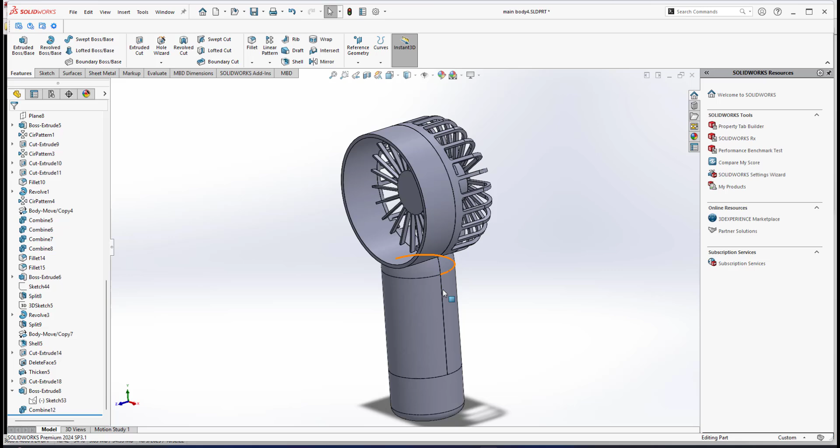This video will be part 4 of my SolidWorks mist spray fan project. In my previous video, I've already shown you how I have done the detailing of this rear casing, where I have shown you how I do this tunnel or channel for the cable or wire to pass through, and here where we mount the DC motor. And also I've shown you the cap to encase the tunnel here.

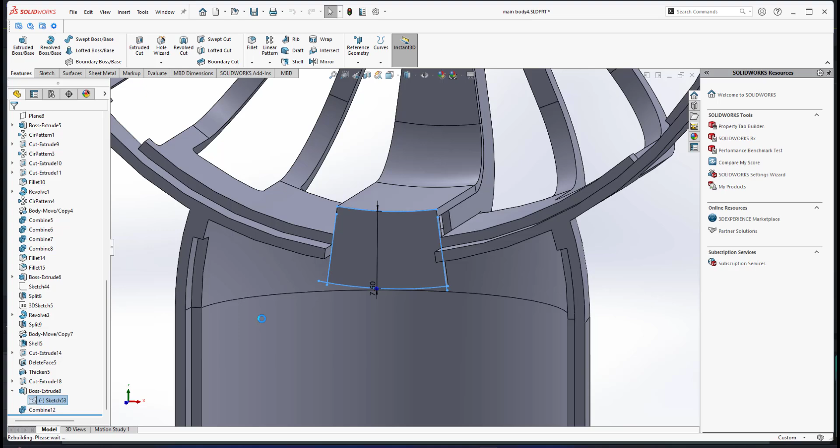So let me exit isolate, and this cap and this rear casing I isolate. So I've done an adjustment, and if you look here, this sketch I've already edited. It's kind of like I traced convert entities of these edges, and I extended the shoulder longer; instead of 5 units previously, I make it 7.5.

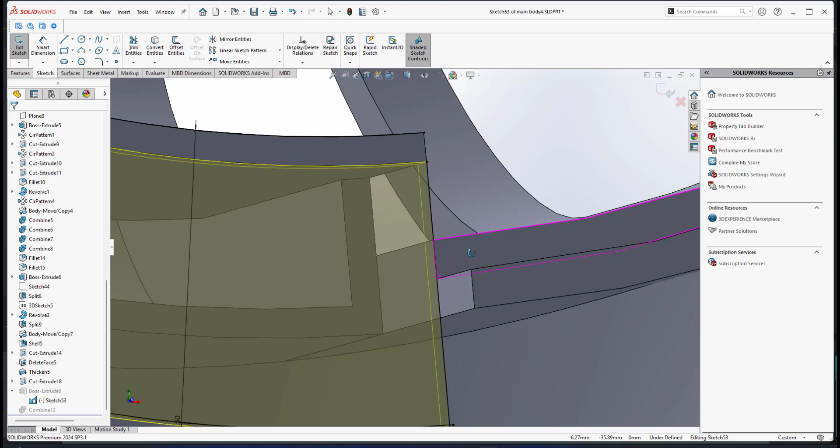So I have the extended version of that shoulder. Now it nicely fits onto this rear casing. There's no intersection, right? All right, for this part 4 video, I will show you another feature. Since this cap is encasing the tunnel, this cap needs to be securely fitted onto this rear casing.

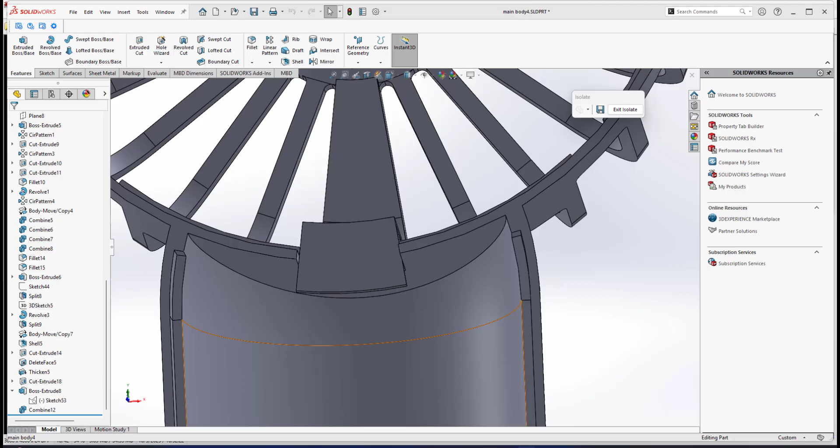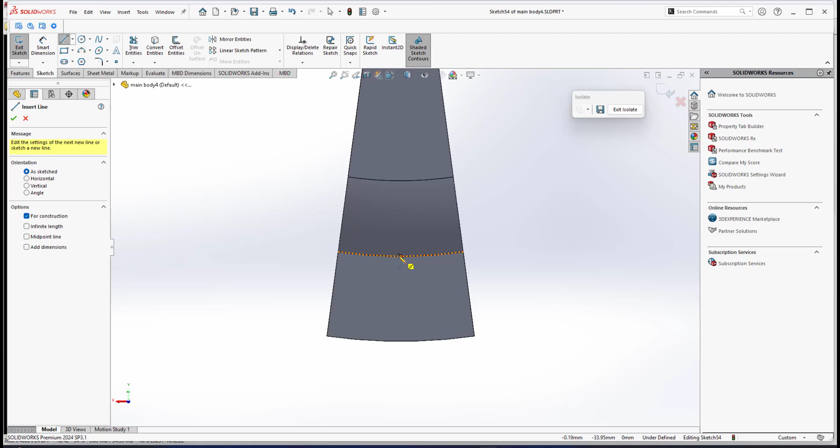Let me focus on this cap here. So I need to create a pin. I have a flat plane, so I will create 2 pins there. Before that, I create a center line from this middle point to this middle point. Now I will create a circle to create the pin. Then I can mirror this about the center line.

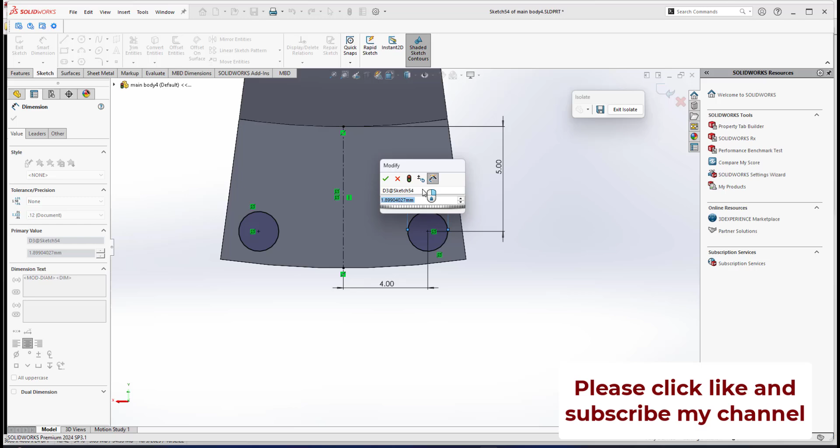Now I can position the pin by giving dimensions: from here to here I put 4, and from this center point to this point I put about 5. The diameter of this pin will be 1.5. I don't want the pin to be too big, about 1.5 millimeter. So these 2 pins I will extrude.

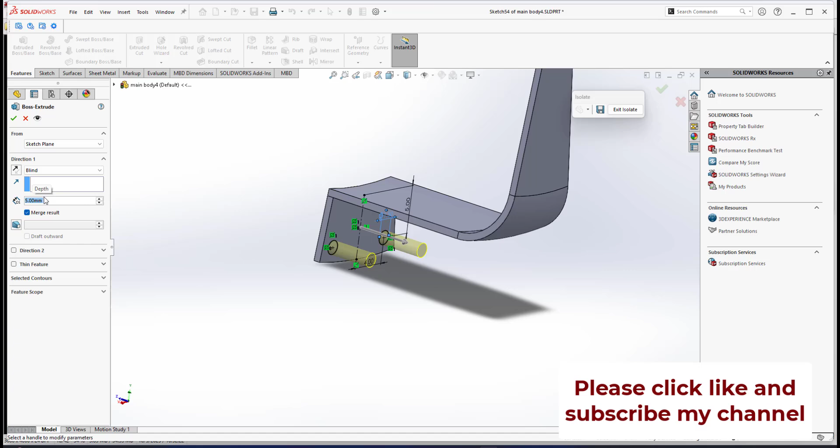I will do extrude. I'm not using up to surface, I'm using blind, and I go for 5 millimeter. Later I can adjust whether the length of these 2 pins is good enough or not. So these will be the 2 pins. Now I exit isolate, and let me isolate the cap and also the rear casing.

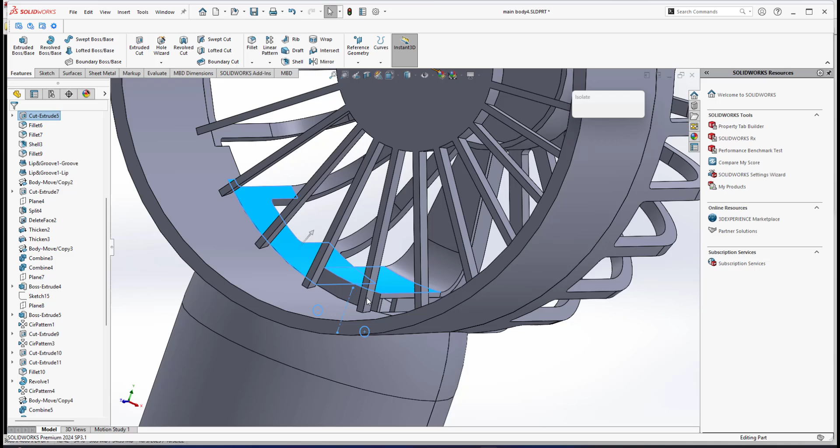Since I have 2 pins here, at the rear casing I will create hollow cylinders, so the pins fit nicely into the holes of those hollow cylinders. So they will hold this cap in a fixed position. Now I'm going to create the hollow cylinders on this rear casing.

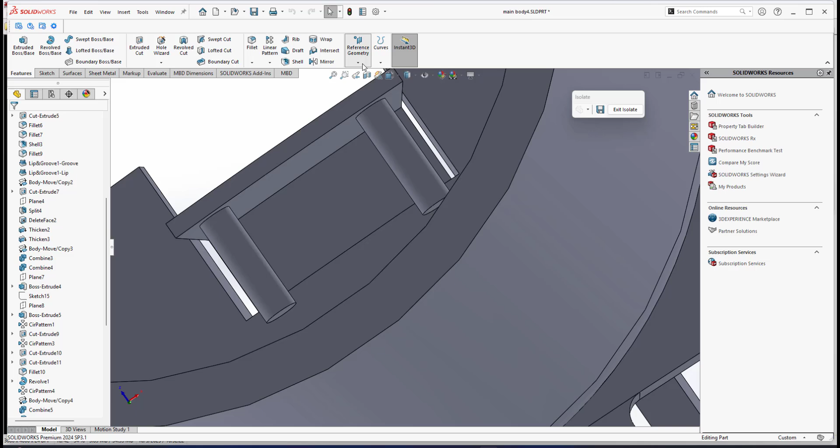I will create a plane to position where I want the hollow cylinder level to be. I can use any flat plane here, so I will create a reference geometry plane from this flat plane. If I go for a distance of 5, that's about the length of the pin, so it will not fit into the holes. I have to make it shorter, like 2 millimeter. So this 2mm will be the level of my hollow cylinder.

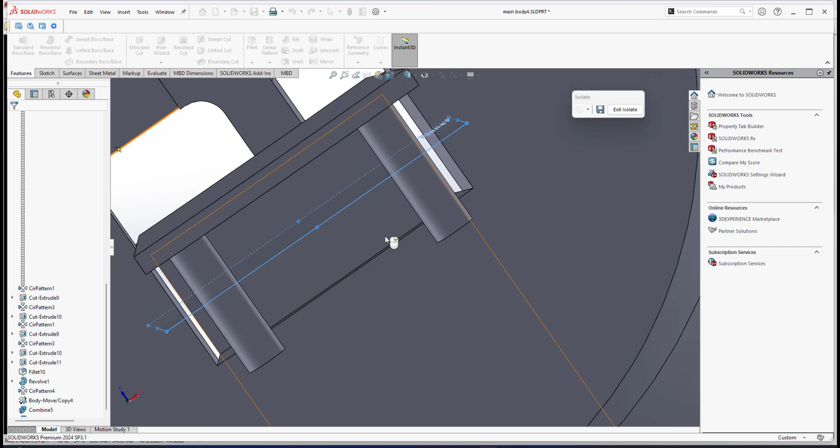So this will be the level for my hollow cylinders. Now I have a plane already created here, so on this plane I create a sketch. Let me scroll like this. So this will be the sketch plane, and I'm now in sketch mode. I will trace the outline of this pin.

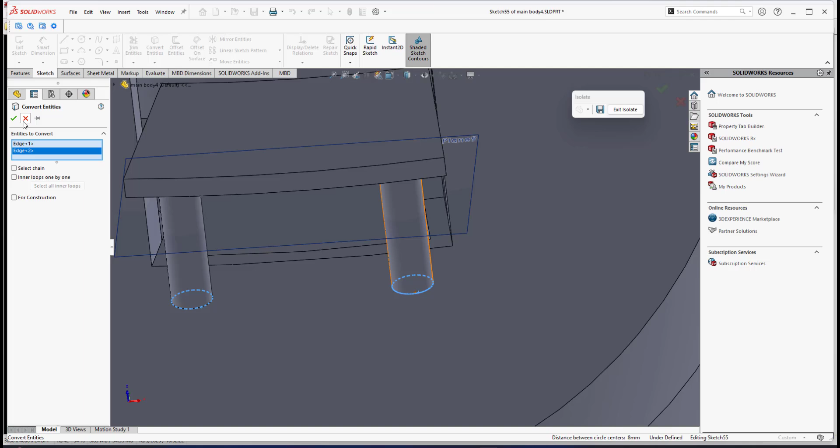I can select even the surface, and the surface I convert to entities. Okay, I cannot do that. Let me go for edges. Let me do that again. This edge, and hold on, carefully select the edge, then convert to entities. So I have a trace image there.

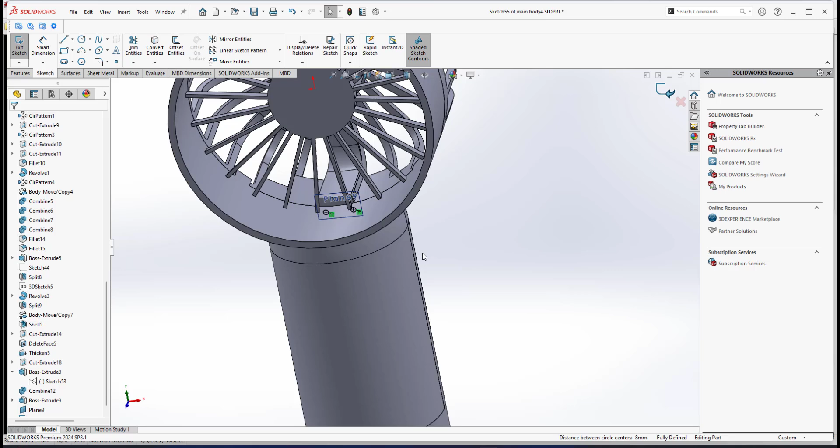Okay, now I exit isolate because I don't want to disturb. When I do modeling, I don't want to affect something. It will merge with the, I wanted to make it a separate modeling, but it is on the rear casing. I already have the trace image here. So I exit sketch. Now I focus on the rear casing.

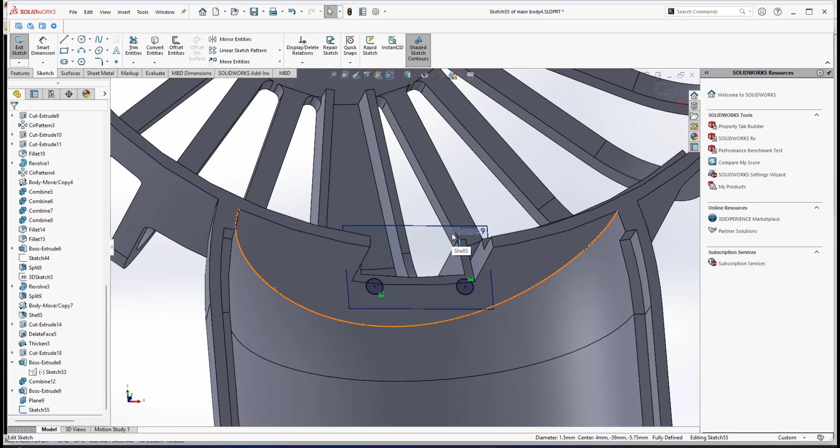So this sketch I will use to make a hollow cylinder. I already have the trace image of the 2 pins. So I edit the sketch, right? And now this is the diameter of the pin. So I will make an offset by about 0.5. Let me try for 0.5. So this will be the thickness of the hollow cylinder.

Then I click OK. So these 2 profiles here, I will do extrude. I'm using up to surface. And now if I click OK, we have the features of these 2 hollow cylinders, right? Hollow cylinder onto this rear casing. Let me save my file.

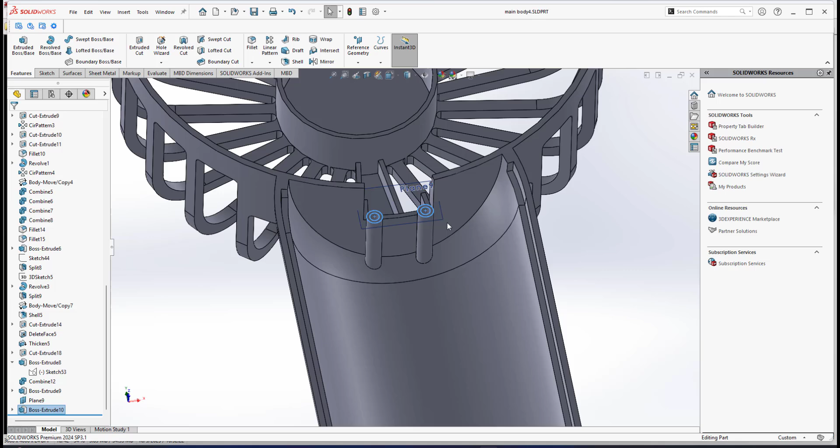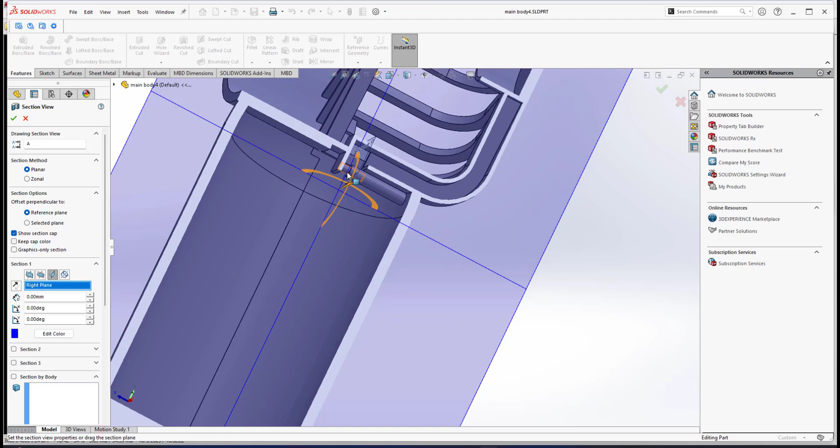Okay, so if I exit isolate, right? If I go for section view, right section view, let me show you. I can go for this section view. If I drag it, you can see the pin. No, I go for right section view. Hold on. I go for right section view, then I can show you the pin is nicely fitted.

Okay, if you look at this section view, this is a pin from the cap, nicely fitted onto this hollow cylinder, right? Okay, that's the feature I want to show you. Okay, let me save my file.

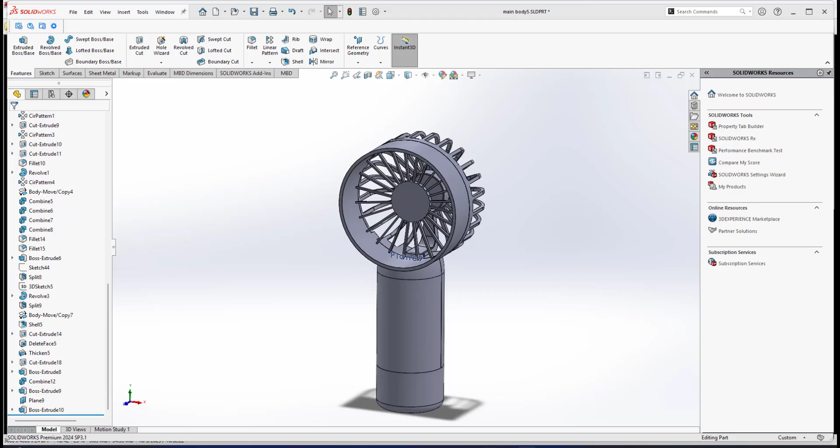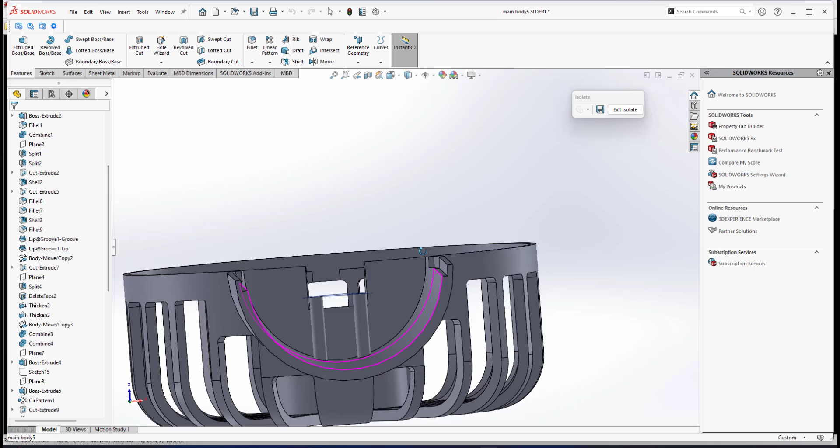Okay, I will isolate first and do the bigger cylinder on the rear casing. Since I mentioned the level of that cylinder is about this level, in my first video I already showed you how I make the cutout, the groove. I found out this groove is not perfectly on a 2D plane, so I will do a reference. So I will create a plane. My first reference will be this face, and second reference is this point, about this height. So this will be my new plane to create a sketch.

So I will create a sketch. Okay, now I will create a center line, at the middle, like this, right? It's at the middle point. Okay, now I will create a circle. And then I will do mirror. Mirror entities is this circle, and mirror about is this axis.

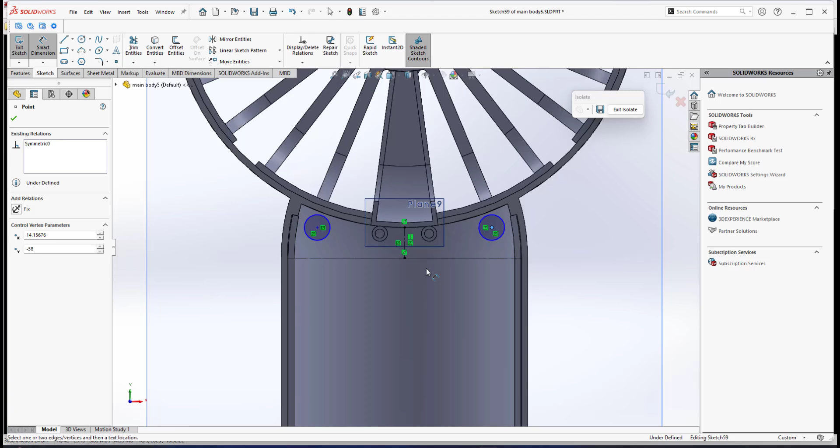Okay, now I will give the position to these circles. I will go for 14. Hold on, and the y coordinate from that point, I will go for 5, right? And the diameter of the cylinder I already measured. The diameter of the bigger cylinder is 5, right? And the diameter of the one on the front casing is 3, right? So the diameter is 5.

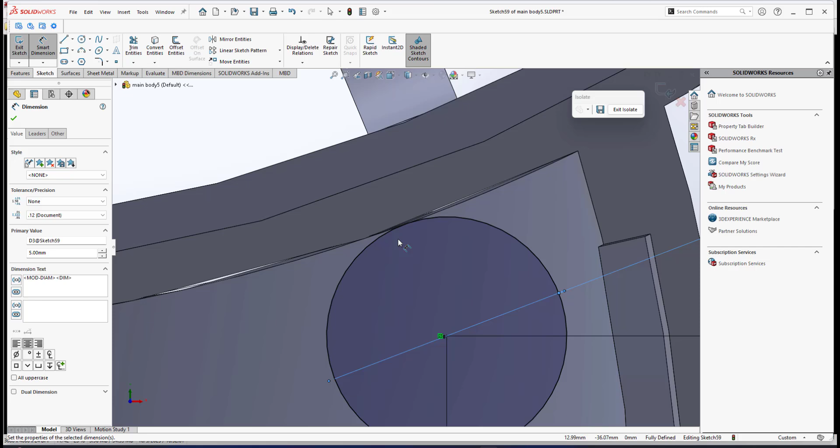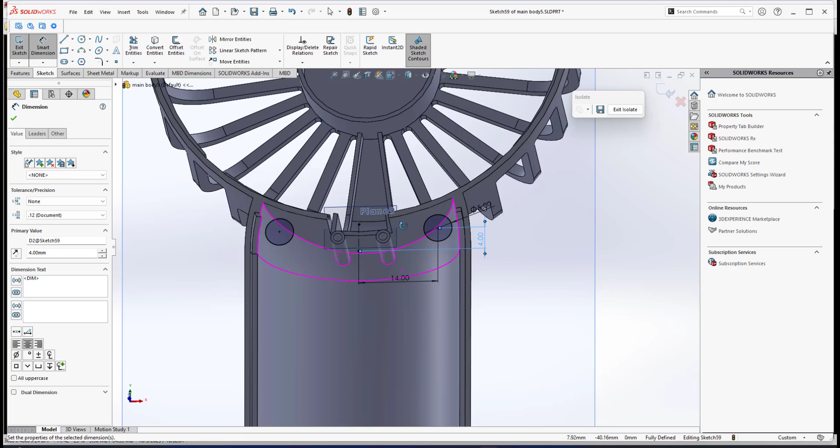Hold on. All right. If 5 is too big, it's touching the edge, I can play around with the distance. It's not supposed to be 5. I put it as 4. I don't want to touch the edge here. If you extrude, it will produce an error where we have 0 thickness. So make sure we have a little gap. So this is the position for me to create the cylinder at that level. Then I will do extrude.

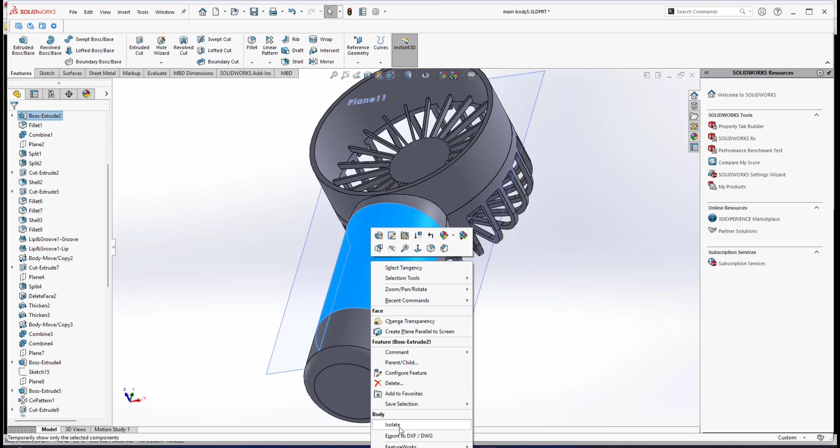Okay, if I isolate, all right, for the front casing, I will isolate the front casing. For the front casing, I want to do this cylinder at the same position; the center point is the same as the previous 2 cylinders. Now I want to do these 2 pins, I call it, at the same position.

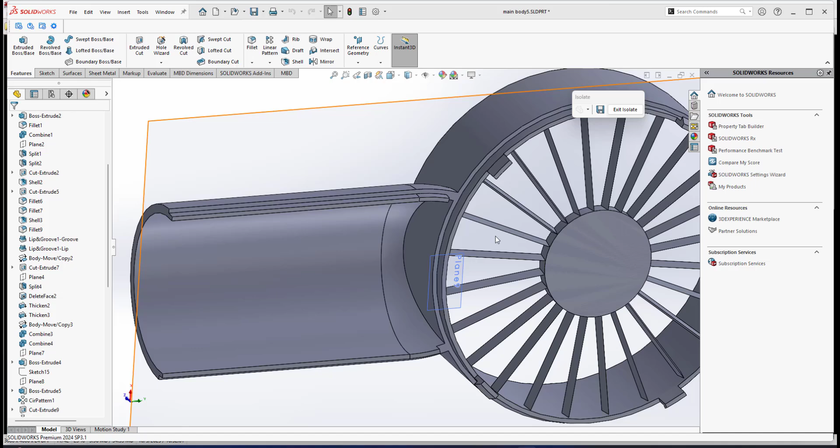So what I will do on this front casing: I already have the boss extrude where I've done the bigger cylinder previously. I turn on the sketch, so I have a reference. All right, I have a reference. Okay, now the front casing is a little bit higher, a little bit higher than this surface.

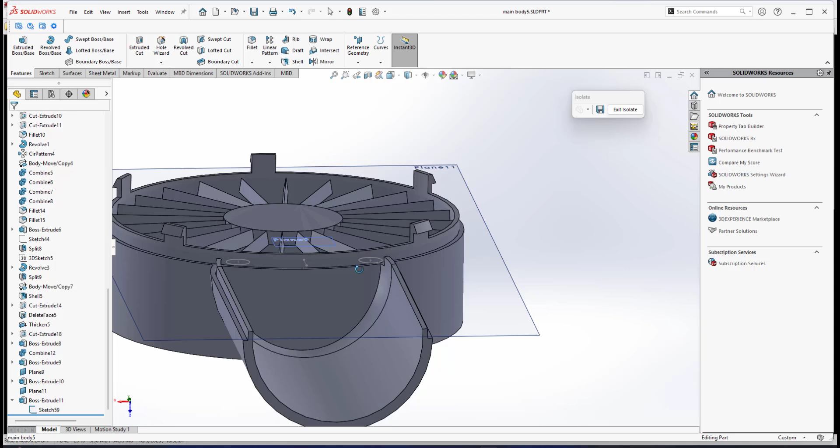So since I cannot use this surface as a plane surface for my reference, because previously I've done this using manual cutting lip and groove, I can use this plane 11 here as my first reference, but I will make a certain distance which is higher. So I use reference plane. First reference will be this one, and I go to flip offset.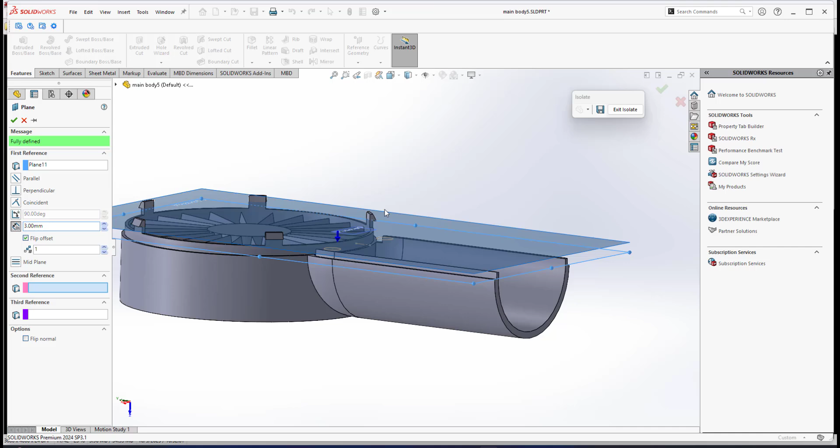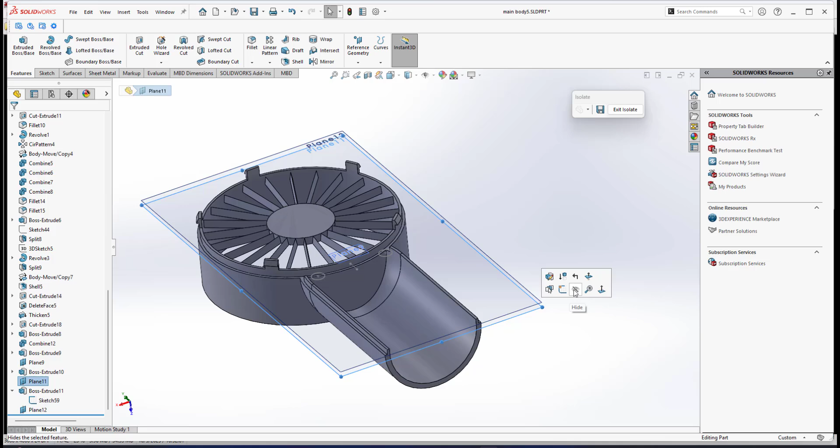I go about 3 millimeter above, so a little bit higher. Maybe not 3 millimeter, I can go for 2 millimeter, a little bit higher like that. So this will be the level of my new plane here, plane 12. Okay, plane 11 I turn off. So I need this plane 12 to do the other 2 pins on the front casing.

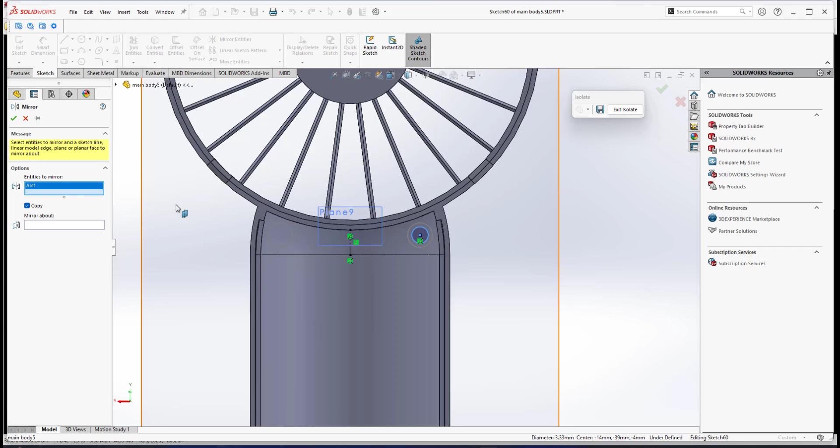Right, I make a sketch here. I press spacebar, I turn to the other side, so I can use the sketch of my previous cylinder here as a reference. So I will do a circle at this point, and I also need to create a center line from this point to this point, right? Then I can do mirror entities on this circle, and mirror about this line.

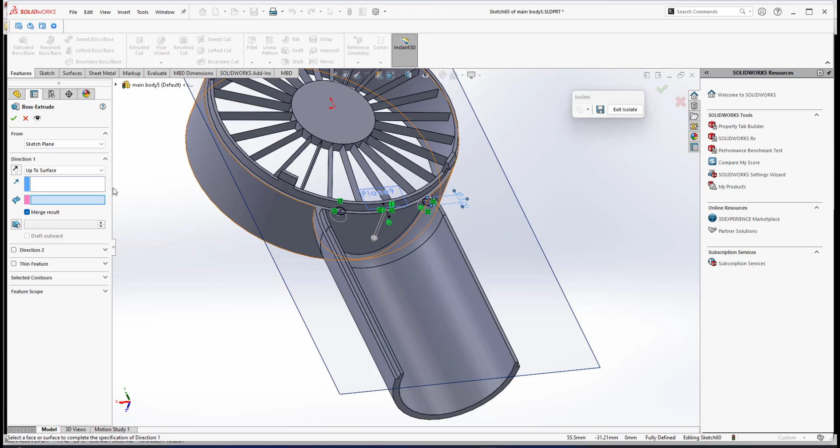Okay, this one, as mentioned to you, is 3 millimeter. This is 3 millimeter, and for this feature I will do extrude. I will do extrude using up to surface, so it will stop at that surface. Right, so I have these 2 pins.

Okay, if I isolate and show you the section view. If I drag it up to the position of the 2 cylinders and the 2 pins, hold on, sometimes it's hard to show in this section. Okay, I can go for this section view, one side of it. If I scroll up until here, as you can see, at the top is the rear casing, bottom is the front casing.

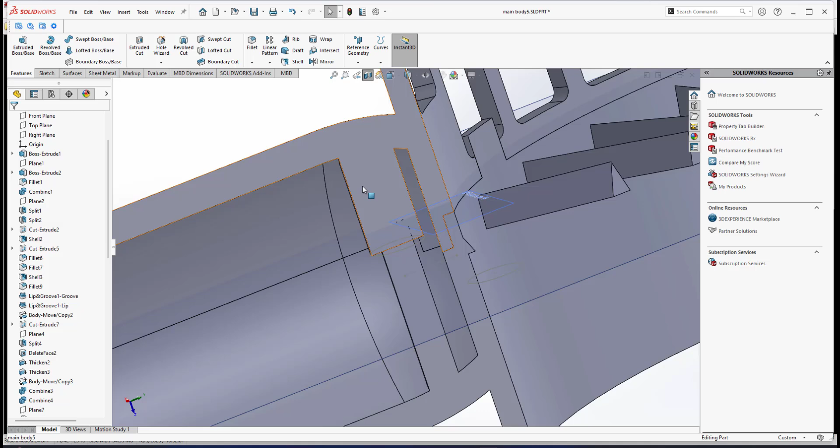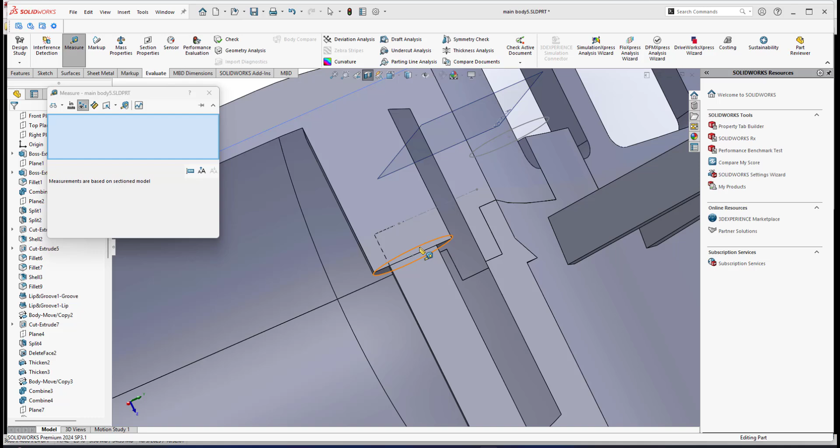As you see, the pin of the front casing kind of cuts through this bigger cylinder. So it means on this bigger cylinder I need to make a cutout about this level. If I measure the distance of the cut through, on the tab here we have Evaluate, so I go for Measure. If I select this sketch and the edge, it states that the Z distance here, DZ, is 2 millimeter.

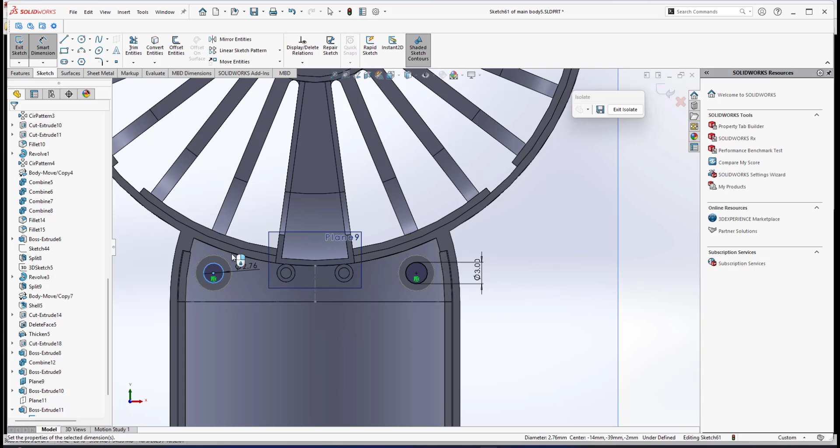So I have to make a cutout of 2 millimeter on this rear casing, the bigger cylinder. It means I select this face and I do a sketch, making sure it's at the center by a distance of 3, and also a circle here with a diameter of 3. Okay, then I make an extruded cut of 2 millimeter.

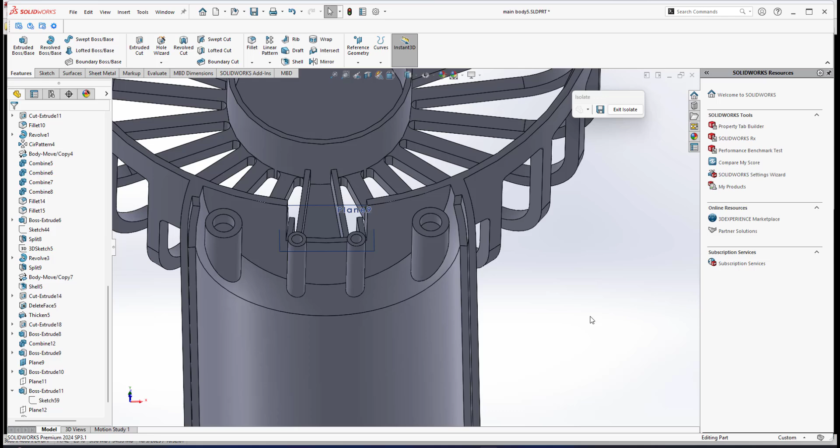So this will be the cutout, right? So I have this thing. Okay, let me off this one. I want to have a clear view, and also this sketch I off it. Right. Okay, if I isolate, if I go for section view, right, so this one is a... okay, as you can see here, the section view.

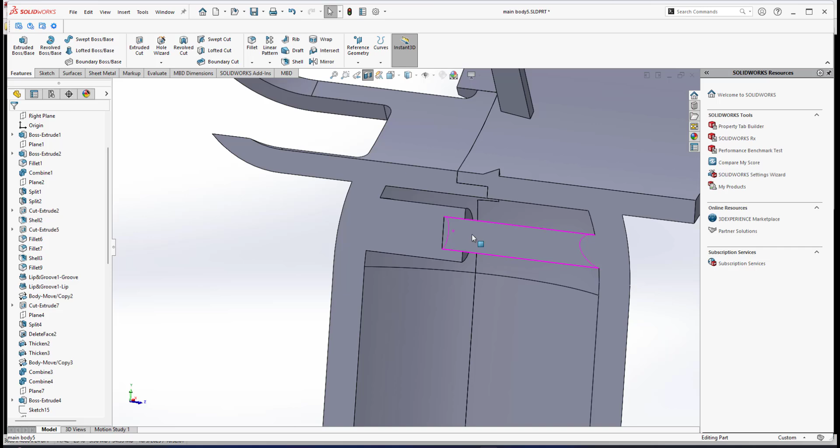This pin is from the front casing, this is the cylinder from the rear casing, so it's kind of like fitted here. Okay, actually the way that this thing is jointed, we have cut-through holes here where we will fasten the screw. Alright, to do that, okay, at the back here, the holes where we will mount the screw, where we have the two big cylinders I have just created, as you can see in this photo.

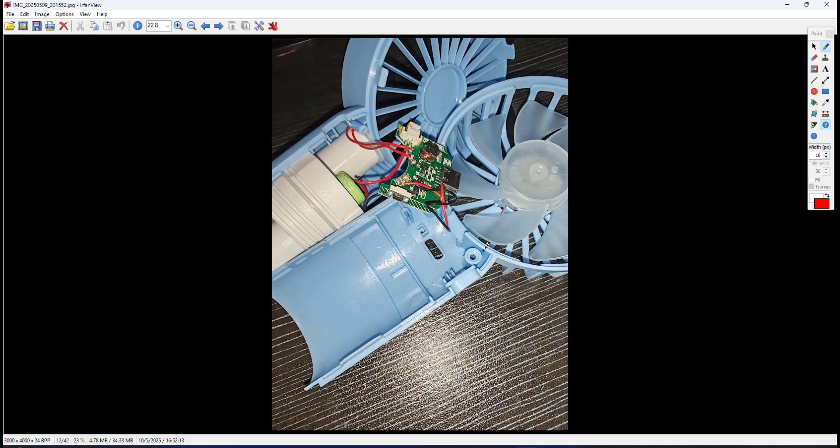So we have a cut through. This is the rear casing. It's cut-through holes here. It's at the back actually. Okay, at the back this is the rear casing. If I isolate the rear casing here, the location of the cut-through holes will be here. So I will create a plane. Since I have a flat plane here, I can use this plane as my reference. So on this flat plane, I will make a sketch.

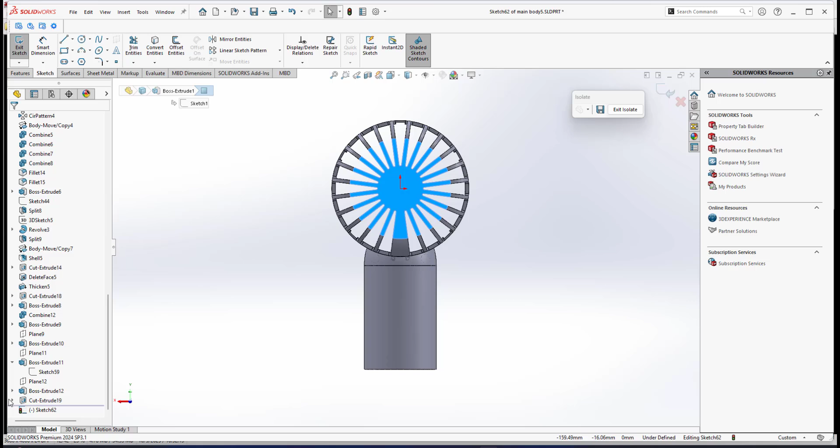One way is either I can go to display hidden style, or I can turn back on the previous sketch of this, so I have a reference now that I'm in this sketch plane. I will go for the same diameter. So I will create a circle at this. I can trace it, but I don't have to, I convert entities, and also this one I convert entities. So I have these two things.

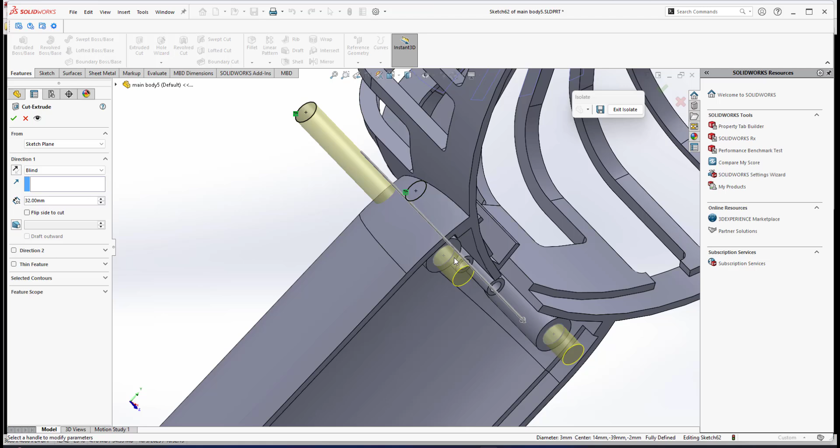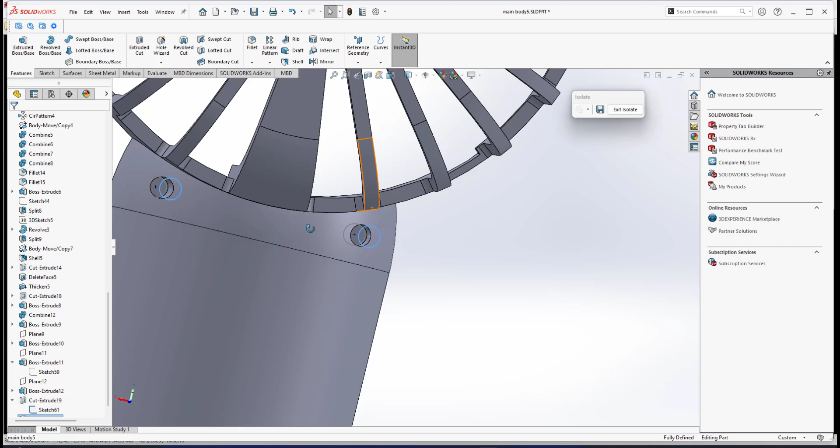Now I will do extruded cut. About the extruded cut, let me play around with the distance first. If I drag it until I have the distance, it's not passed through here. It kind of stops at a certain distance. Like this one is 32. If I go for 25, 25 is about this length. So this is the length that it will cut through. Let's say I go for 25 and I click OK, so it will do the cut-through holes there, where we will mount the screw.

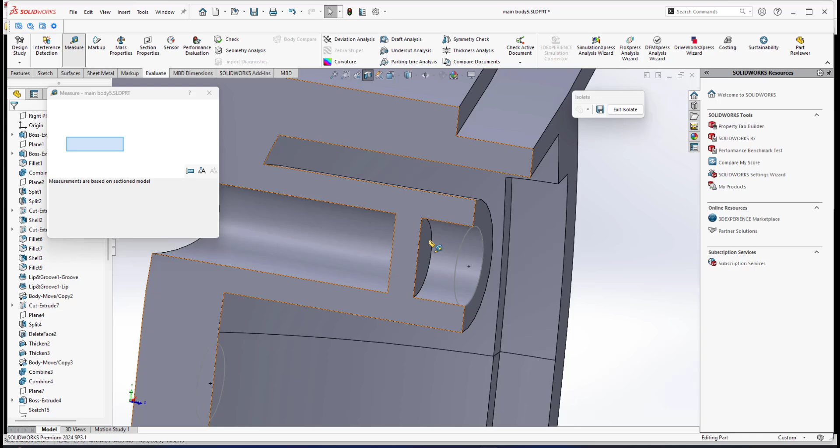Okay, if I go for section view, just to check the depth of my cut-through hole. If I do a measurement just to make sure that everything is okay, I don't want it to be so thin. The distance is 1 millimeter. 1 millimeter distance means it's too thin. Instead of 25, I go for 24 millimeters. It means I have a kind of 2 millimeter thickness. So the screw will be mounted here.

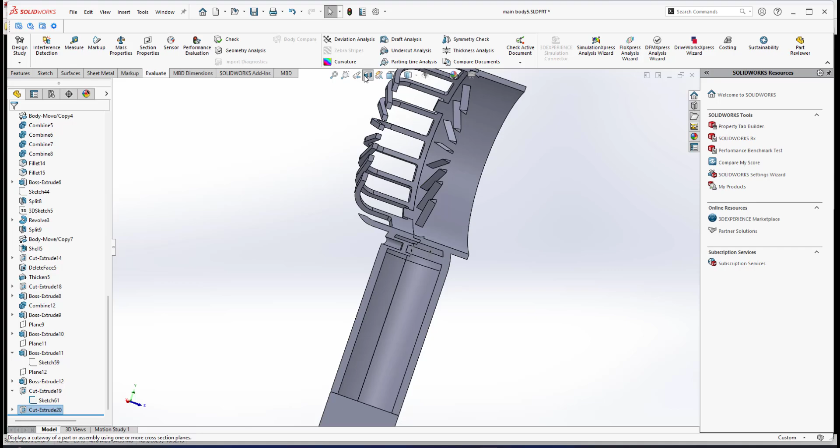Maybe on the next video, I will show you how I mount the screw, and we have the inner thread cutting through this, right? So this will be the feature where we join the front casing and the rear casing by these fastening features. So we have two tiny screws mounted at this surface, right? So let me save my file. And I go back to standard view.

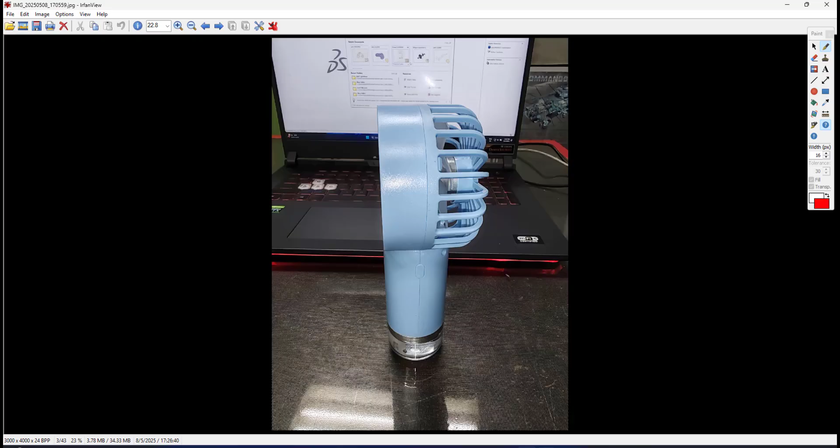Alright, the next thing to do, if you look in this photo, this is the bottom container. In my part 1 video, I have already shown you how I split this into the bottom casing here. One thing that I need to mention, we have a metal ring wrapped around this bottom water container. The thickness of that metal ring is 6 millimeters. Let me show you how I will do this in SolidWorks.

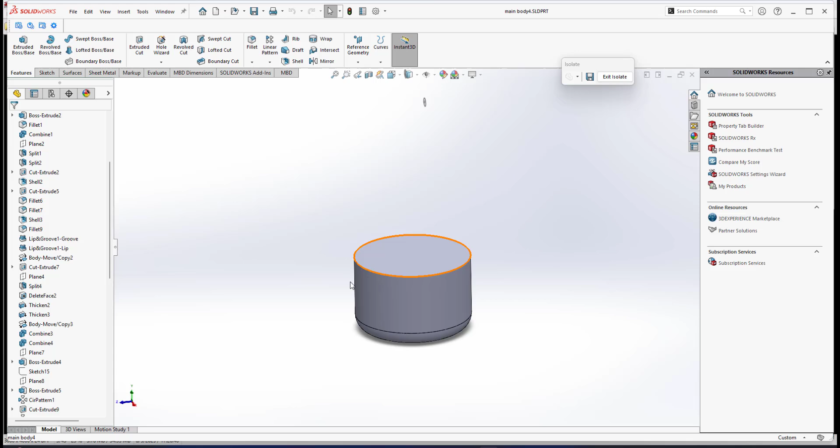Since here I have already split the bottom casing, but I have not yet made a shell on it. I'm not using shell, so I will extrude cut. Later I will show you. Alright, this bottom casing is still solid, I need to split it since we have a metal ring. So I will make a plane of 6 millimeters, and flip it inside at the bottom here. So I have this plane number 13. This one I will use.

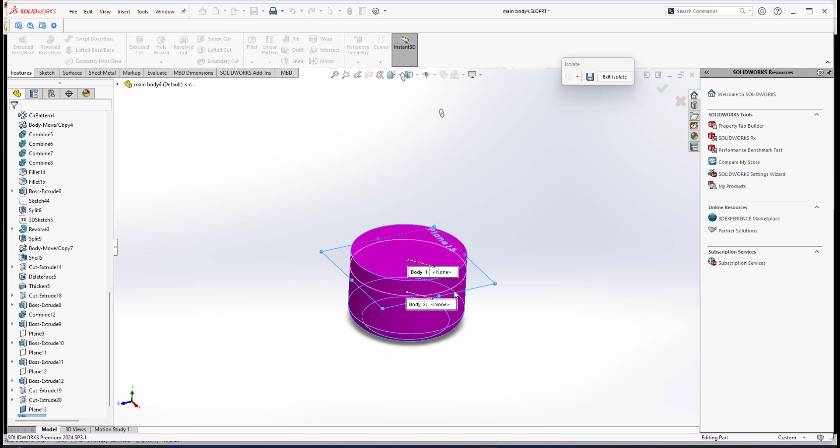So I will split it. Slice both. Make sure that I uncheck the consume cut bodies. So I split it into two bodies. Right. If I exit the isolate. So now I have the ring, but I have not yet made a cut through here. It's actually a ring, but I leave it like that. I will do it later. Okay, about this bottom container. This bottom container is not supposed to be like this. If you look at the photo, let me show you. I have a sketch. Hold on.

Okay, if you look, this is the sketch I've done here. We have this bottom container; 20 is the split that I've done earlier from the bottom. The total height of this water container here is 55. So it means I already have 20, so I will extrude a balance of 35 millimeter. So the balance is 35, and I have the inner cylinder inside.

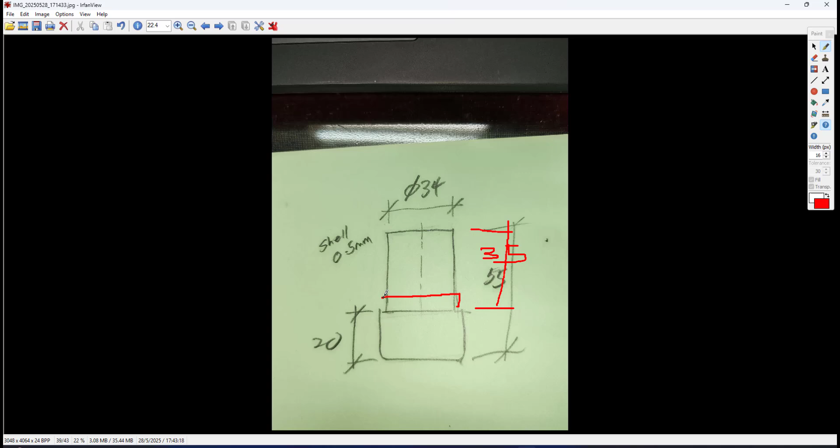This inner cylinder will fit into the rear and front casing. And we have a ring here that will be wrapped around here. I already split the ring, but the ring is solid; later I will make a cutout, right? But before I do the detail of the ring, I have to do detail modeling of this water container.

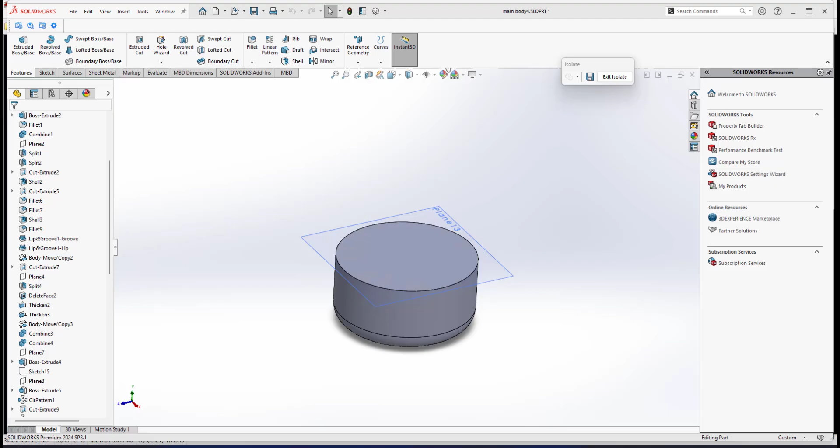Alright, so here in SolidWorks. If you look, the diameter is 40, and the inside diameter of the inner cylinder is 34 millimeter. So here I will do a sketch and convert entities. I will do offset; the offset distance is 3 millimeter. It's outside, so make sure it's reversed to go inside, because I make it 3.

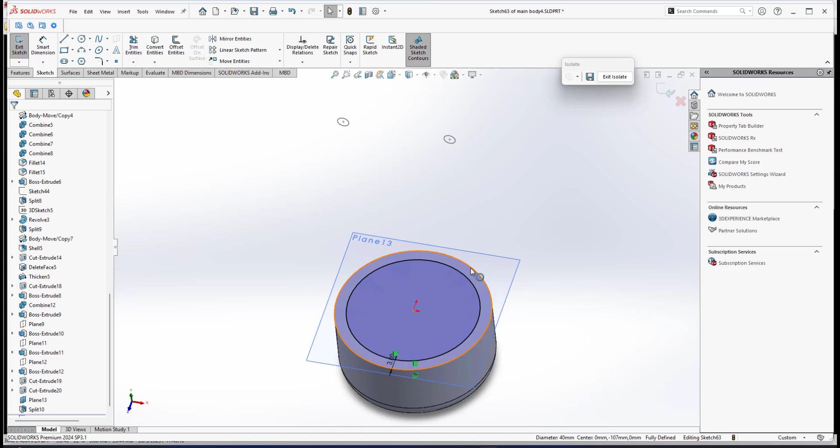And then the outer circle here I make it a construction curve, and this I will offset 1 millimeter, and it goes in that direction. So I need this profile. This will be the inner cylinder of the water container. I will extrude the balance of, as I mentioned, 35 units. So this will be the inner cylinder.

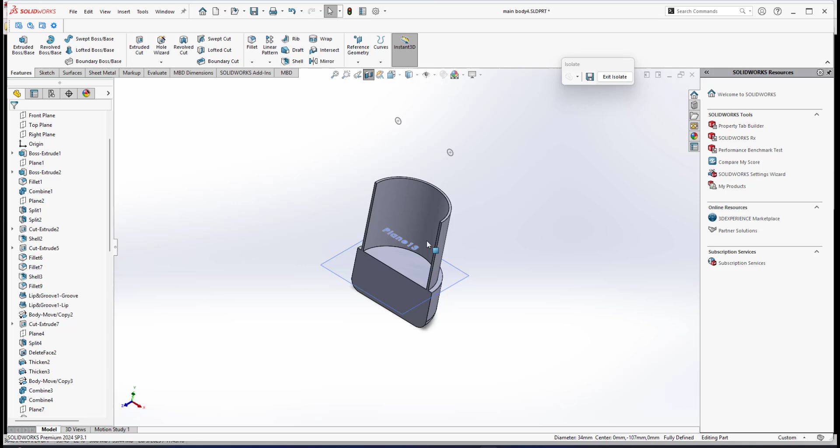Alright, if we look here, I still have solids. If I go for section view, I still have solids there. The total height from here to the bottom is 55 units, and the balance I have here is 20 units. So here I can create a sketch, convert entities, so I have the outline. I will do extruded cut. Since the total here to the bottom is 20 and I want to leave a floor thickness of 3 mm, I will go for 17. So I have 3 mm left.

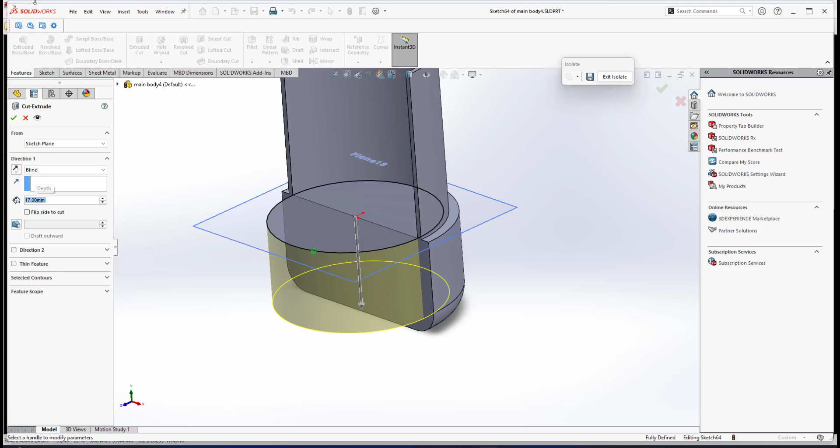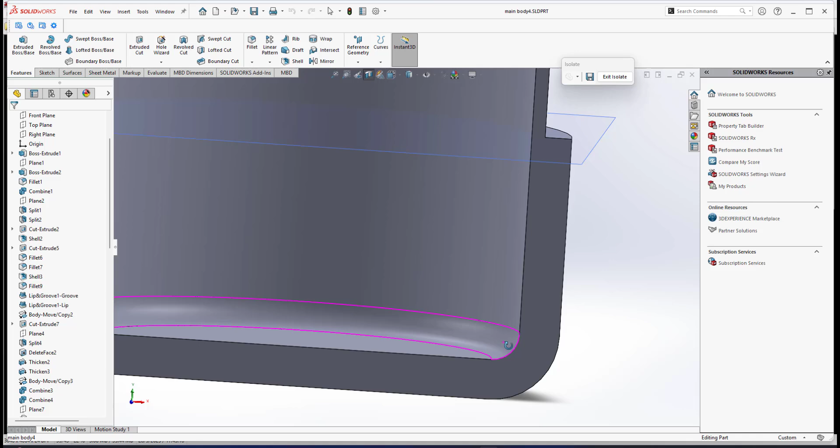Right, so this will be the cutout, and as you can see, the outer fillet here is 5 mm. Since the thickness here is 3, the inside fillet will be 5 minus 3, which is 2 mm. The value of your fillet is important: I make it 2 because the shell thickness of the water casing is 3 mm. So it means that we have a uniform thickness of 3. That's why it's important to set the accurate value of the inner fillet radius of the inner edge.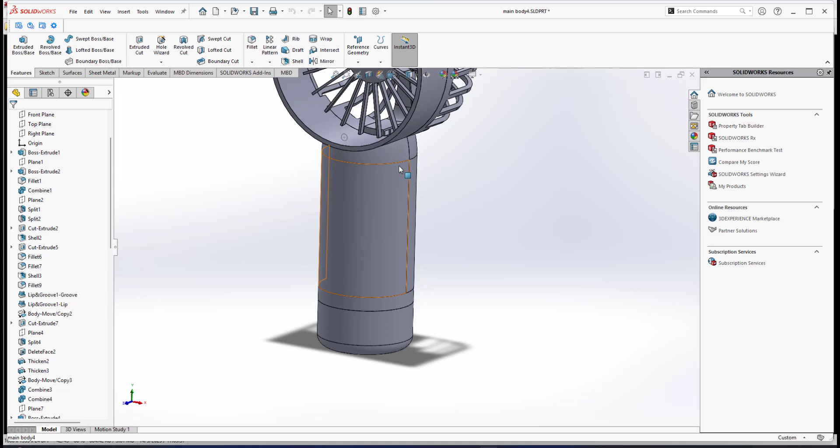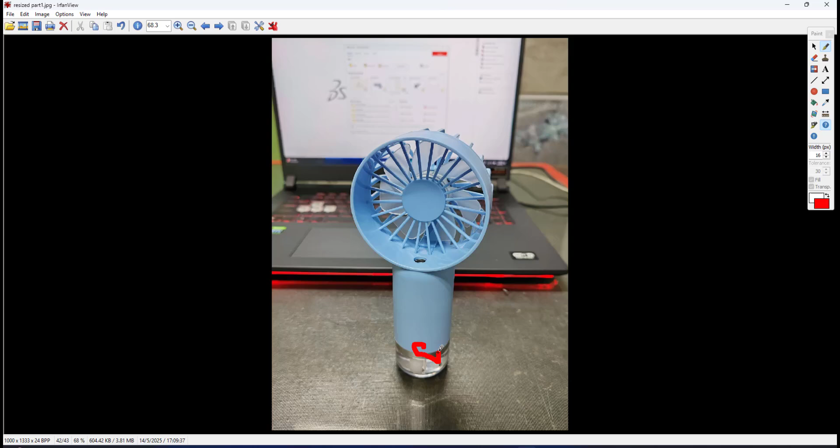Okay, the next thing to do, let me turn off this thing and exit isolate. Alright, if you see here, the ring, if I go for section view, is still solid, so I have to make a cutout. If you look at this photo, we have a ring here. This ring will be fitted onto the rear and top casing. So I need to make a cutout of this ring by 2 mm.

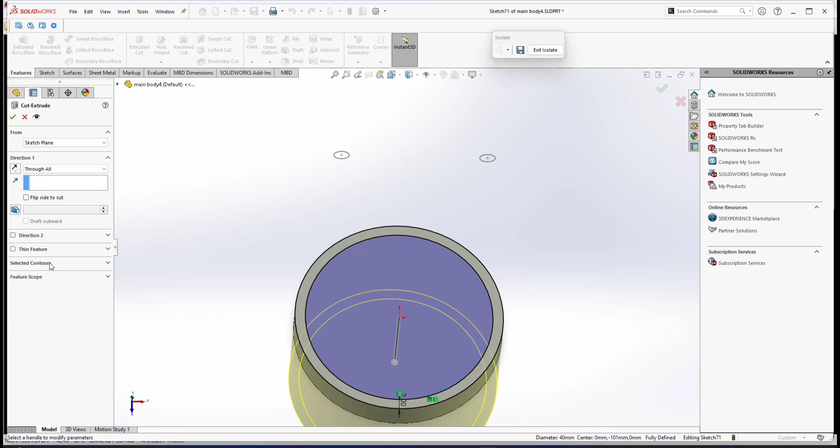So I will select this ring and isolate it, and turn off the section view. At this face, I will convert entities. Then I will do an offset of 2 mm thickness, and go inside with reverse. Then I will do extruded cut through all by selecting the region, the contours, this one. So I have a cutout of 2 mm.

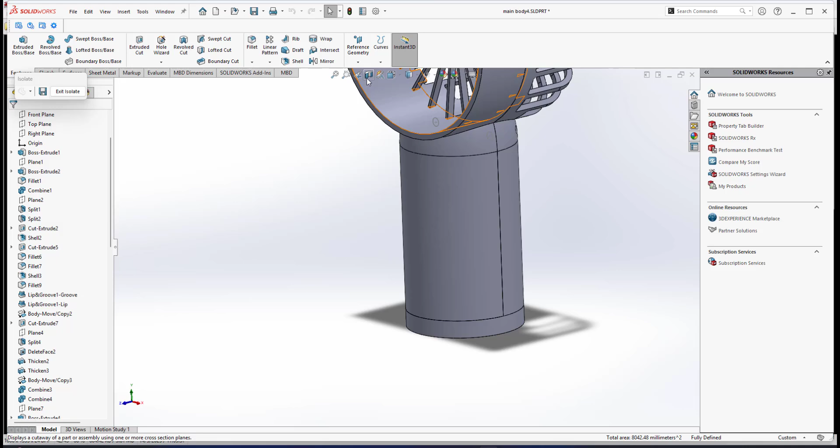Right, if I exit this one, I can show you the ring will be fitted onto this front and rear casing. If I select the front, the rear casing, and also the ring, and go for section view, as you can see, the ring is not just connected to the front and rear casing like this. The rear and front casing have an extruded version, so it will make a cutout so the ring will be fitted onto both of these casings. Let me show you how I will do this in SolidWorks.

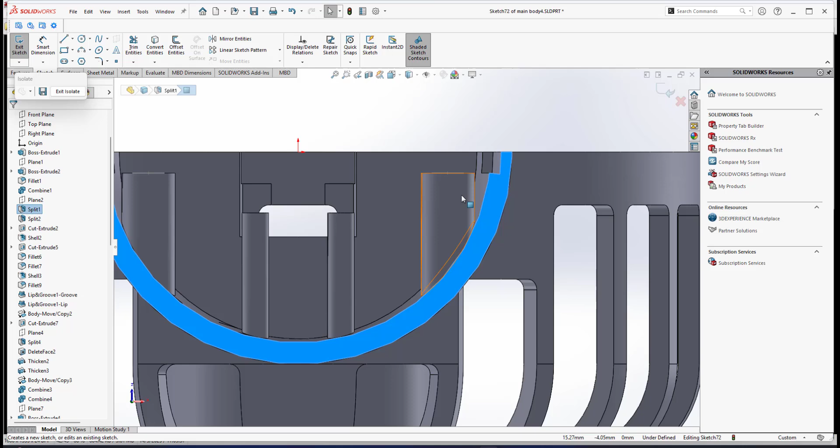So I will focus first on the rear casing. So this is the rear casing. In the rear casing, I have a flat plane here, so I will create a sketch at that plane. Since the total thickness is 2 mm, I will make a 1 mm thickness offset. So I will select these edges.

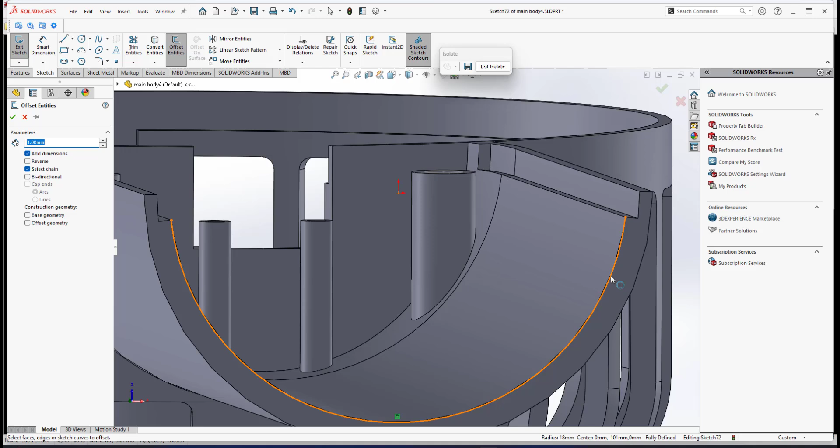Okay, I have these edges here. So I will convert entities, and I will offset it by 1 mm. I select the edges, and it goes like that. In the setting of this offset, make sure cap ends is on, and I don't want arcs, I want it to be joined by line. So we have a closed region there.

So this region I will extrude up until a position that it will cut out the ring. So I just simply extrude first; later I can adjust the distance. Since the ring is 6 mm, I will go for 5 mm. It means the ring will have an extra 1 mm. So I will extrude at 5 mm, and make sure it's merged.

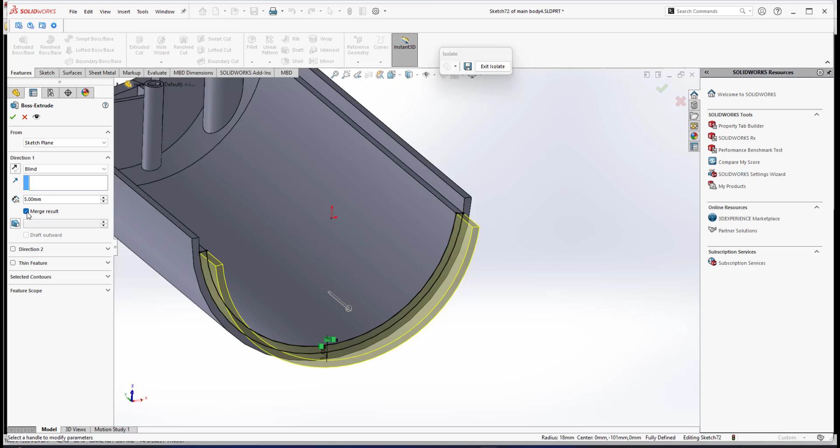So this is part of the rear casing. I make an extended version for the rear casing. If I exit isolate, for the front casing I will do the same approach. For the front casing, I create a sketch, select these edges and convert entities. Then I will do an offset of 1.

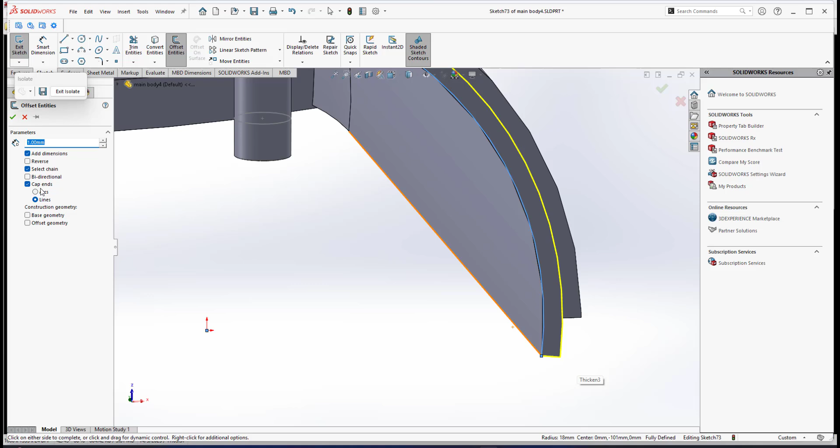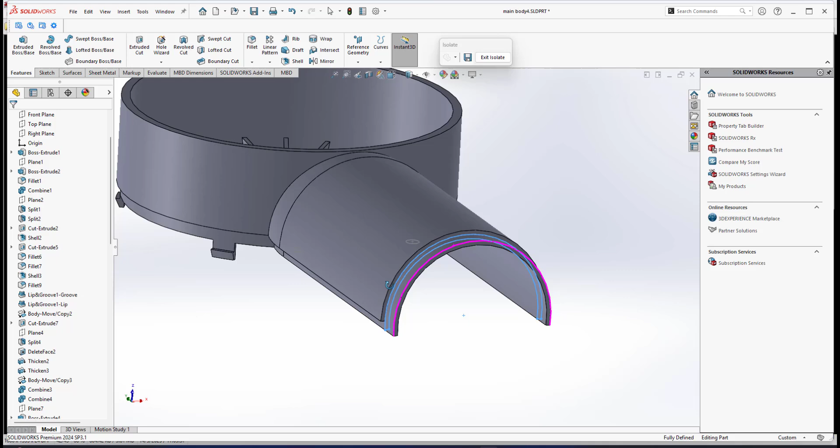Select this edge and make sure cap end is on, and also the line. So it creates a closed region. This one also I will extrude 5 mm. Make sure it's 5 mm and make sure merge is on because it's part of the front casing. So we have an extended version of this front casing and rear casing, so we have these features.

If I exit this one, this is the front casing, and this is the rear casing. We still have the lip and groove. If I go to section view, we have the extended version of the rear and front casing, so it will cut out the ring. I have not cut out the ring yet, so I need to make another extruded cut.

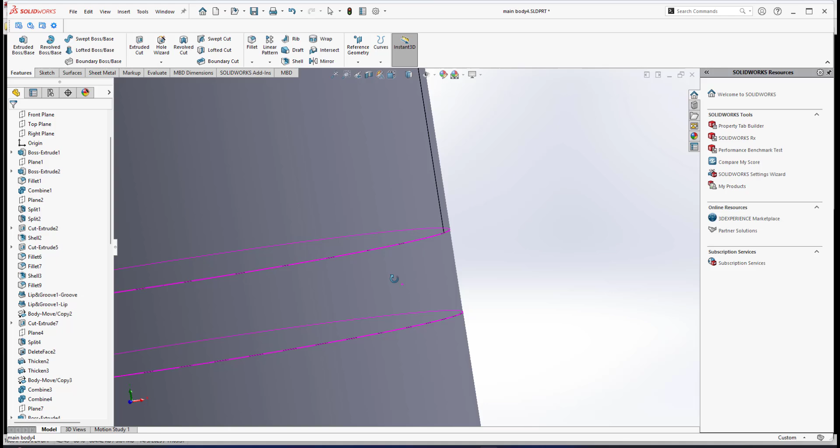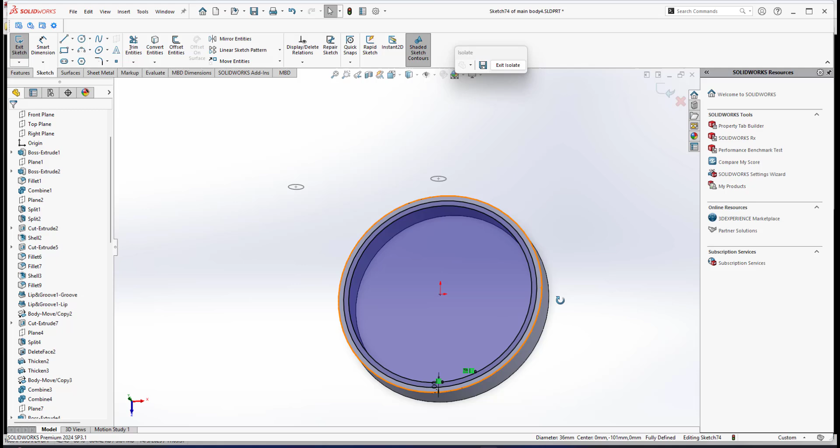So in this ring, I will create a sketch here. I convert entities, then offset 1 mm, so it goes there. Then features, extruded cut, not through all, I will go blind and the distance is 5. Since the total height of the ring is 6, it will cut out by 5 mm. So we have this for the ring.

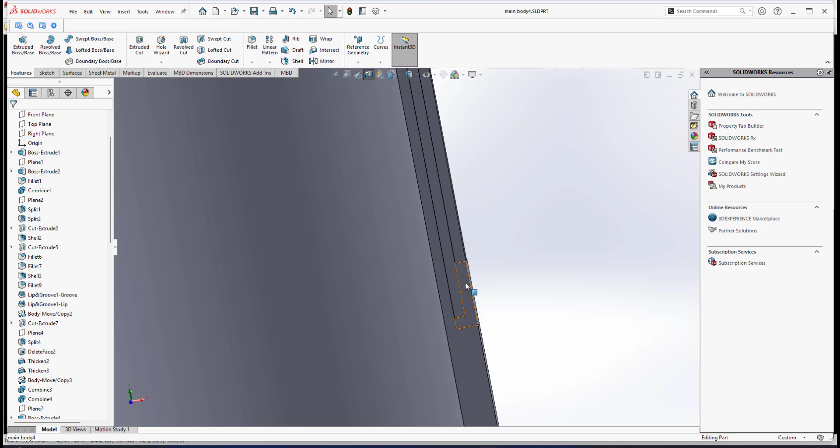So the ring will be fitted onto the front and rear casings. Let me save my file again. If I show you the section view, now we have this water container at the bottom fitted onto the rear casing, and the ring fitted onto the front and rear casing. That's how all the components of this portable fan will assemble.

Let me go to standard view, and I save my file. I think I will stop this video at this position. Inshallah, I will do more detailing of the front and rear casings in the next video, since at the front casing we have another feature, a snap hook, and also a snap-through for the rear casing.